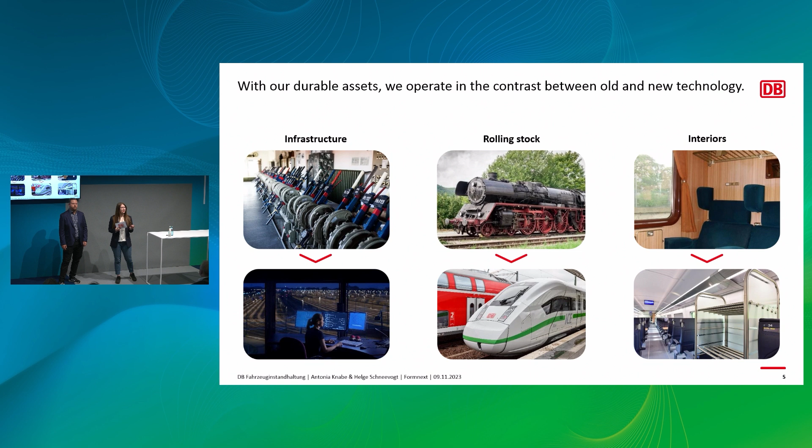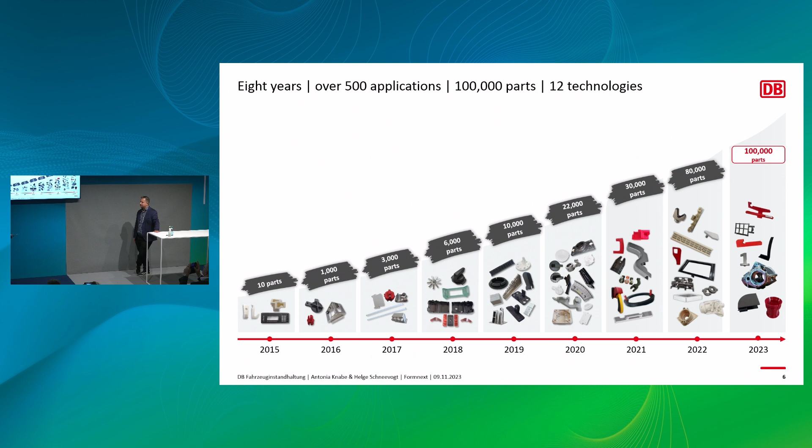Actually, we started, or we are involved with 3D printing for quite some time now. We started in 2015, and we gradually worked up to 100,000 spare parts until now. We cover over 500 different applications. We use 12 different technologies. We mainly print plastic, but also metals. We also print some more exotic materials like elastomers.

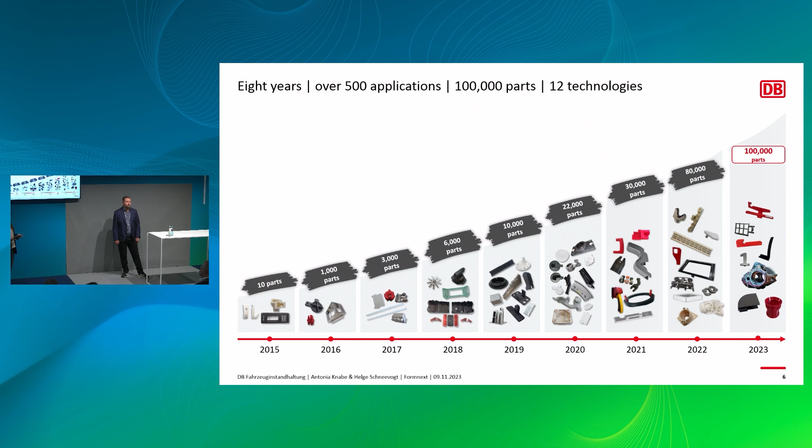But we brought some nice cases with us today. On this slide, you might see a lot of red. You maybe think of children's toys, very red and colorful, but we want to focus today on tooling, so on jigs and fixtures that are 3D printed. For us, it's really not child's play. We take this topic very seriously, because for us the 3D printed tools are just as valuable as the 3D printed spare parts, because the saving effects are in the millions, and they're almost as big as with the spare parts we print.

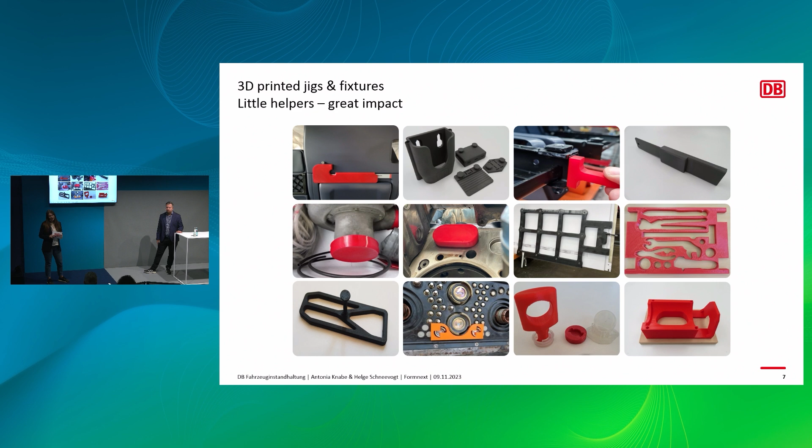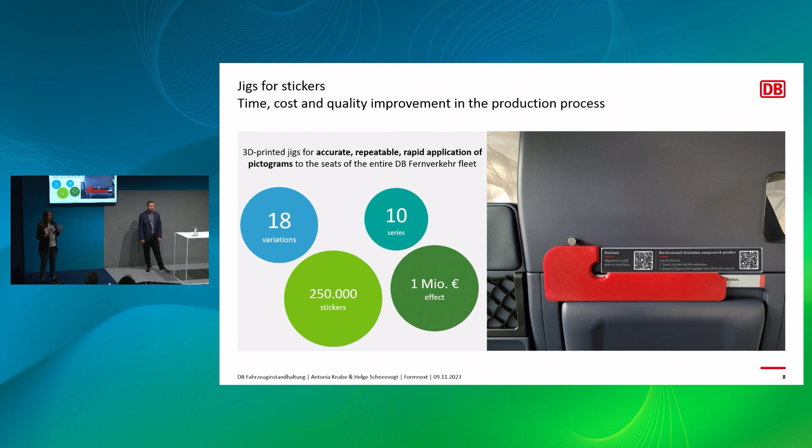I brought a highlight project from last year with us. That is a jig, and we printed it in 18 different variations for these feedback stickers you might have seen on the train. 250,000 of these stickers were applied, and we also took some time measurements, and with this little jig we could save approximately 1 million euros. So you see, it's a little helper with a great impact.

It took a lot of time to fix it. Sometimes they have to be fixed, sometimes they even have to be changed out again. It costs us in production around 50 euros and saves in each case around 5,000 euros. And in a train we don't only have one luggage rack, we have a lot of luggage racks, and we have different train models. So you see the effect.

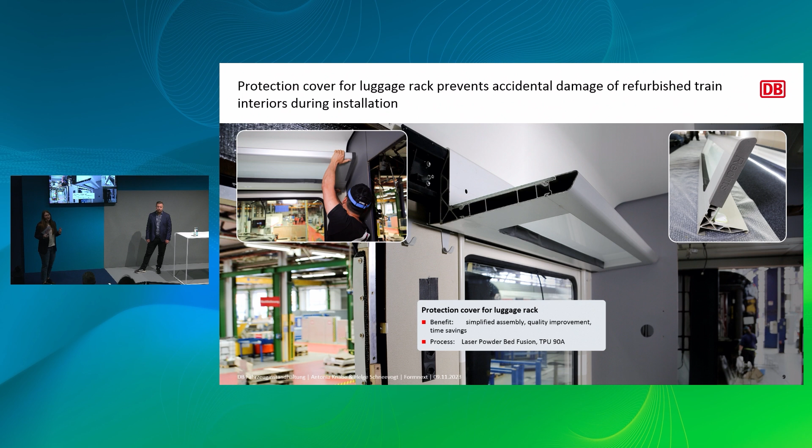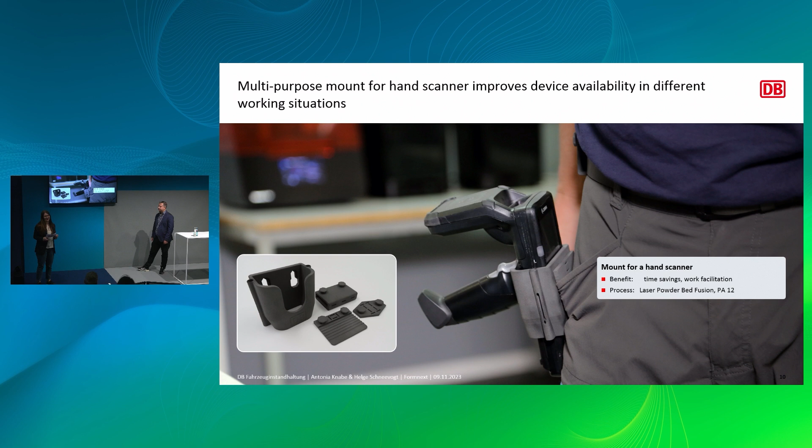On this slide you can see a very little helper. The transparent ones are painting plugs, and I think every one of you has maybe painted a wall, and the taping is this -- it sucks, it takes a lot of time, it's really annoying. With these painting plugs, it's easier. Before we start painting, it's inserted in the hole. This flexible, transparent material we printed on a Formlabs Form 3, an SLA printer. These are inserted, then the train is painted, and afterwards we remove it with the red one, that's the FFF printed tool, and we get these out afterwards.

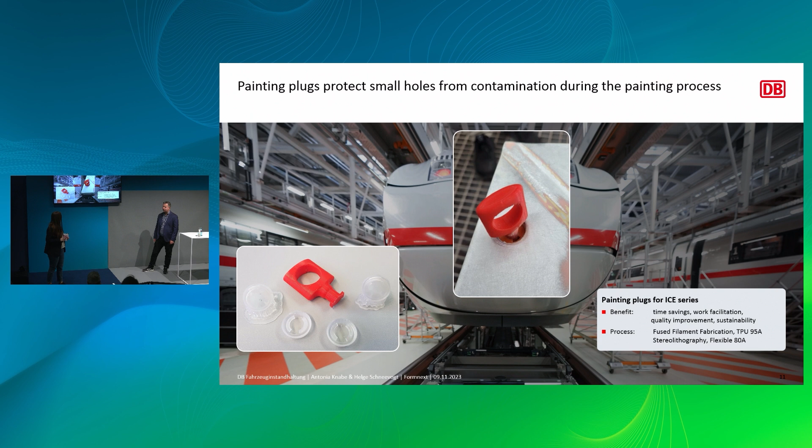This is one of our biggest tools, an exhaust air duct, used to clean the air ducts of a train. On the right-hand side, in the middle picture, you see the original one. And this one is the lightweight air duct that we constructed.

It's one of our biggest applications, but much smaller and lighter than the original, which is made out of sheet metal. The one on the right weighs 15 kilograms, the new one only around 6, so now it can be used by only one person, not two - much lighter. Work economics are improved, and another advantage is if it drops, it doesn't break because it's made of TPU.

But like the other one, when it fell down it was also a safety hazard - you can imagine 15 kilograms falling is not something you want, and it also bends, so you could not reuse it again. This one is reusable, much lighter, and we could fix a lot with that.

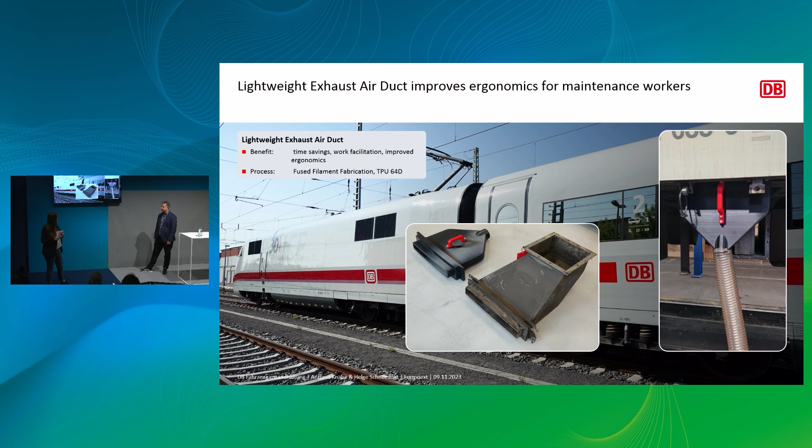We've seen something out of metal, we printed something out of TPU, but Helge, do we also have some printed metal tools at DB? Indeed, Antonia. We also have metal toolings in place.

For example, this adapter flange you can see here - it's actually a topology optimized tool. Topology optimization is very rare with us, as we are a highly regulated industry and maintainer of approved infrastructure and vehicles, so we are usually not allowed to change the geometry and have to reproduce parts as they are. But in this case, it's not a part from a vehicle but from the maintenance depot, so we had this option.

This is for calibrating certain brake valves. The topology optimization not only saves weight but also drastically improves the airflow. You can see this here on that draft.

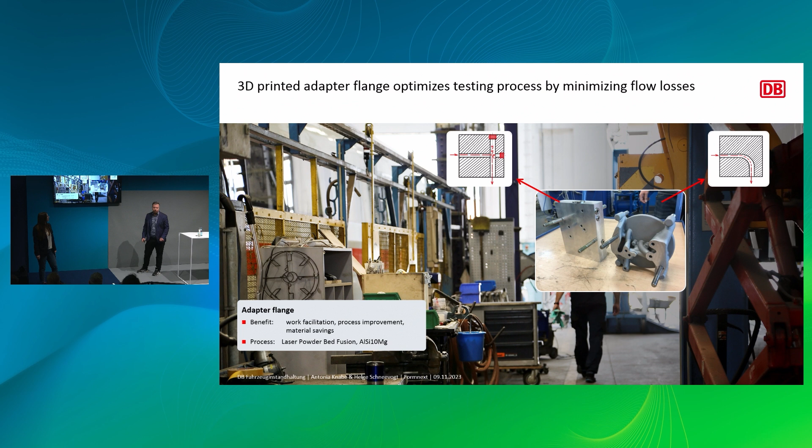We had to drill holes in the rectangle, at a 90-degree angle, and as you can imagine, the flow around a 90-degree corner is way worse than having nice bends flowing into each other. That's the reason why we took this approach - so, a good improvement out of metal for our maintenance staff.

Another interesting application is this tool you see here in the middle, also printed on a Formlabs Fuse 1 machine with very nice, delicate details. And this part is not designed in conventional CAD software.

It was designed in a very handy tool - our colleague Sven will tell you more about it in the next presentation. It's the fixture-making tool by Trinckle, a very easy-to-use browser-based tool to generate really nice fixtures like this. You can then print it on your desktop machine, Formlabs machine, or whatever you have on hand.

For example, position this milk pump just the way you need it on your workbench to work on it. And this design is done in minutes - a great improvement in the design phase. You can see all the details came out very nicely.

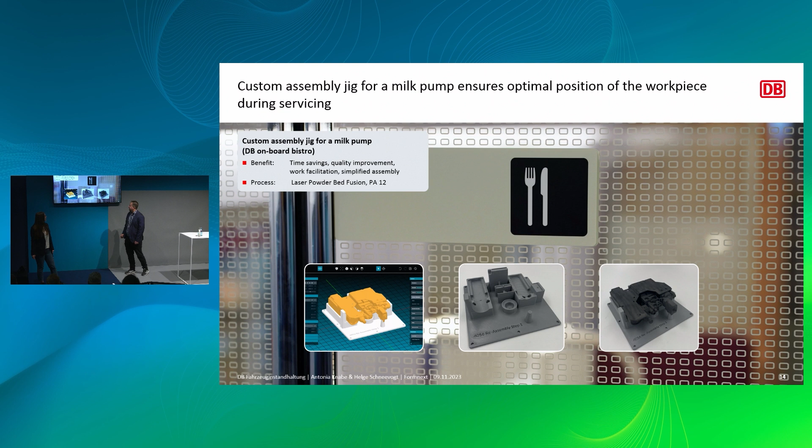And where do we do this? Well, we have a lot of great printing service bureaus we're doing very good cooperation with, but we've also now established 2 sites where we manufacture our parts, jigs, fixtures, as well as end-use parts. For example, here on the left in Neumünster, you can see we have 2 Formlabs Fuse 1 Pluses as well as a Form 3, and we're very happy with these machines.

We also have 2 industrial FFF printers, only used for end-use parts in a certified environment. This is our one big polymer production facility, and the other is here on the right-hand side in Nuremberg, also equipped with a large format printer of 1 cubic meter and several other desktop printers.

Nuremberg is also our competence center for tooling. Many use cases you saw were developed there, and our colleagues there are the internal experts, maybe also ready for additional questions.

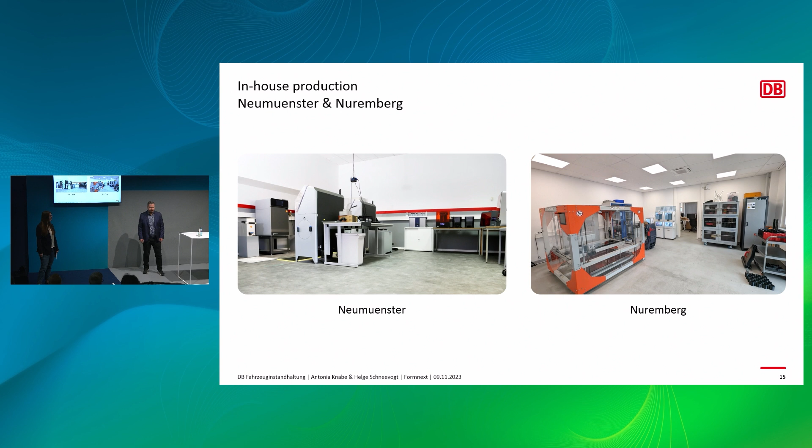But we want more. You've seen we have 100,000 parts already printed and in operation, but this is only for 500 use cases. We've seen the big potential we have inside the company, and with this huge variety of different applications, we think we need 10,000 use cases by 2030, which is roughly 10% of the parts we have in stock.

You have to imagine we have billions worth of spare parts in our stocks - not millions, it is actually over 1 billion. And this is a huge amount of bound capital.

As you can imagine, since these are many specialty parts, when you order them you not only have pretty long ordering times, but you also have the problem of often pretty large MOQs - minimum order quantities - and you sometimes need to over-order more than you need. So we want production on demand, especially for these low-volume specialty parts, where AM comes into play. That's our big vision we're working on now, and we've already taken the first steps.

So what's the takeaway? We have a very, very large variety of different applications. We not only print spares, but also tools, which are equally important to us as they manage to achieve even cost-saving effects similar to the spare parts. We are very happy to use Formlabs and other machines for that, with great results like you see with the sticker applying jigs and the other use cases Antonia just showed you.